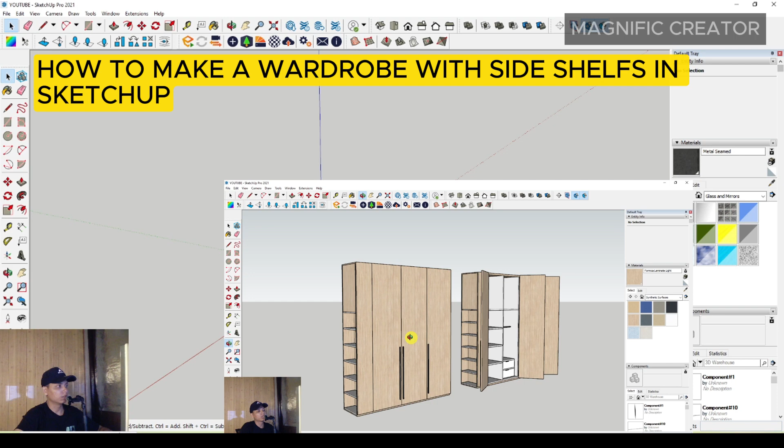In this video, I'd like to share with all of you about how to make a wardrobe with a side shelf in SketchUp.

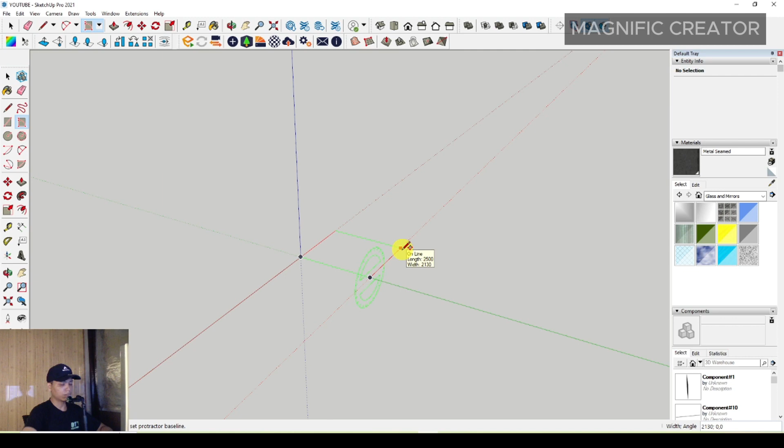First, you have to make a basic plan of the wardrobe. You can set the distance and length of the wardrobe around 2500 millimeters. Then you can set the height of the wardrobe around 600, and push it up until it reaches 3000 millimeters.

After that, you can offset it inside to make a frame, and pay attention to the side. You have to make a space for a side shelf.

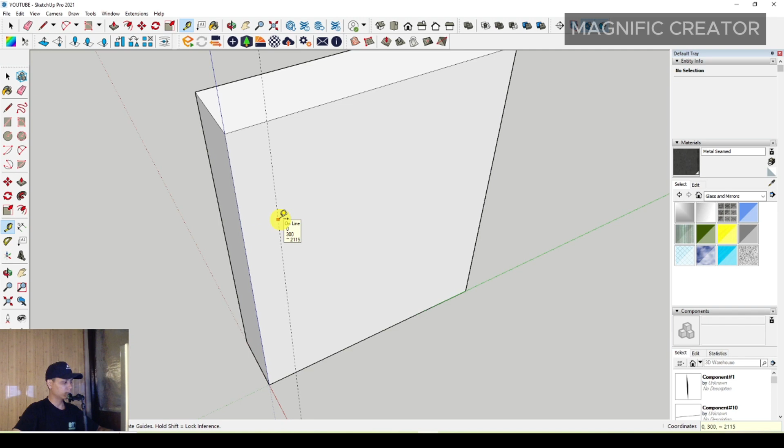It's maybe 300 for this side shelf. Then you can add a line right here, and offset it inside around 40 millimeters. Then push it to the back around 550 millimeters, and offset it inside around 20 millimeters only.

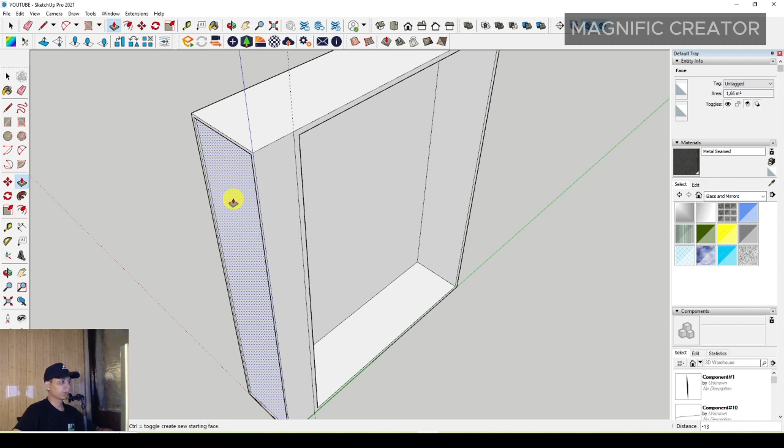Then you can push it until 250 millimeters. Okay, and then you can erase some unnecessary objects, and you'll get the basic shape of this wardrobe design.

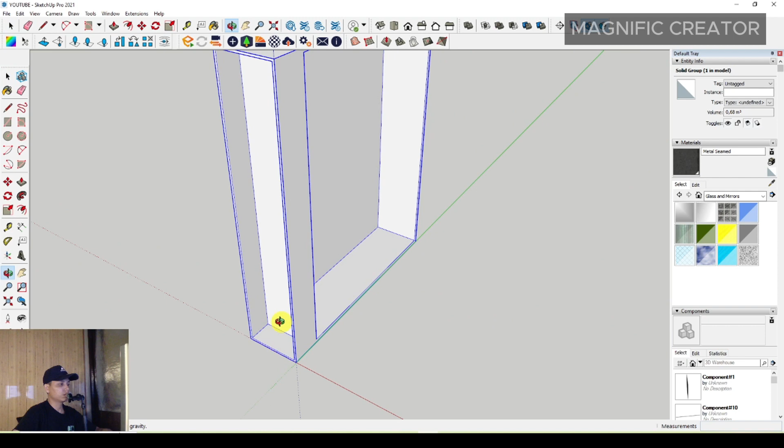Then you can make a shelf using the rectangle tool in this space, and push it up around 20 millimeters. Then just make it a group and make it a component.

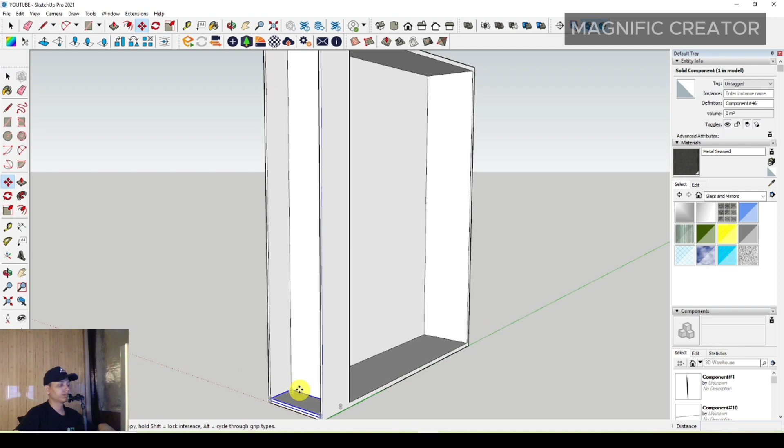Then you have to set the wardrobe height, maybe around the functional daily use of the wardrobe, around 2000 millimeters. You just type on your keyboard 2000 millimeters, then type 6 and slash, and press enter.

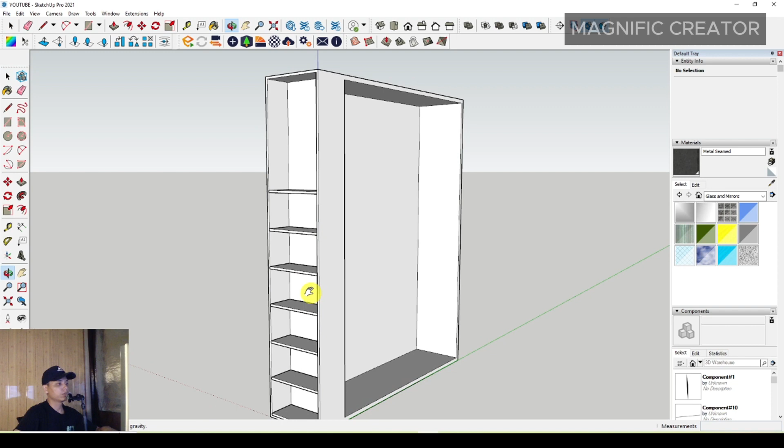So you will get the automatic divider for the shelf, and you can make a shelf again right here. Set the thickness around 30 millimeters, make it a group, and move it up until right here.

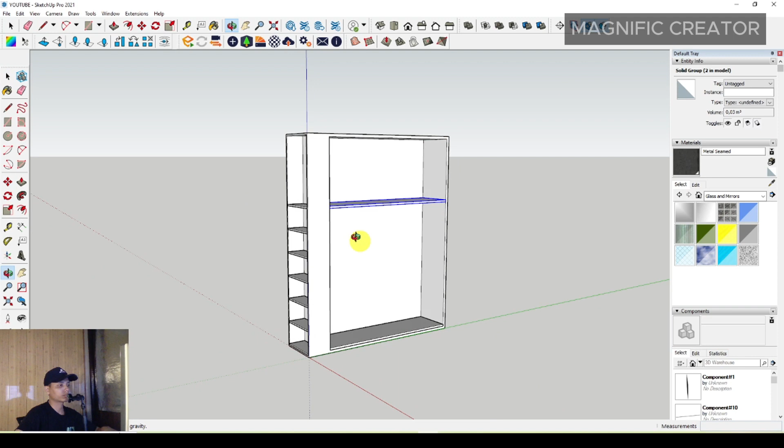After that, you can divide it into several compartments of this wardrobe space. Maybe you can divide it into 3 parts right here, then delete the center line, and use a rectangle.

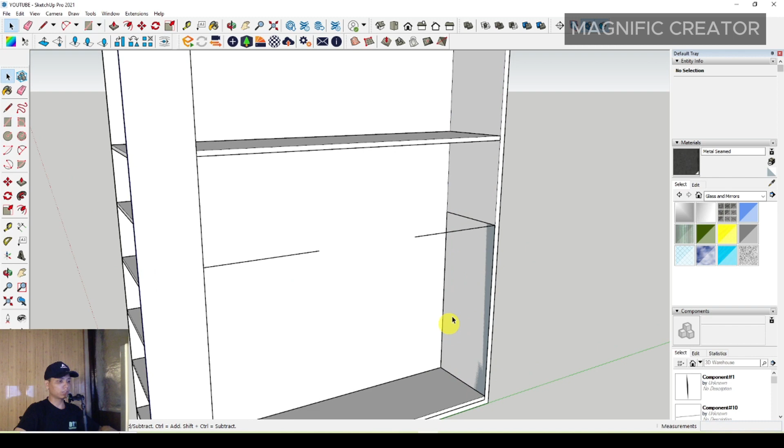You have to draw it first, then erase it, and push it to the left side around 30 millimeters, then just make it a group.

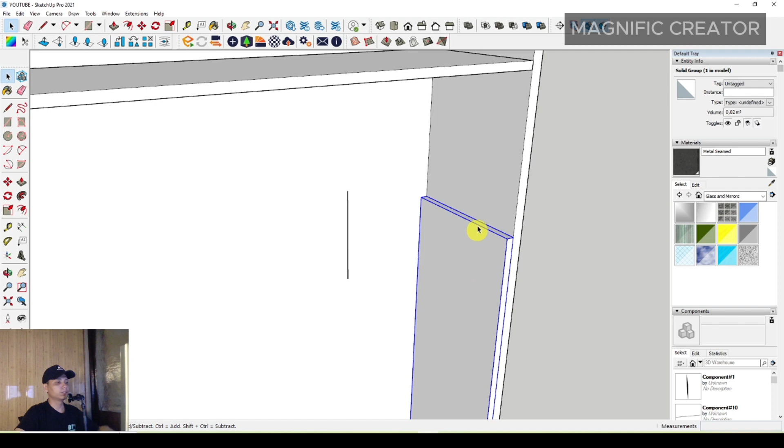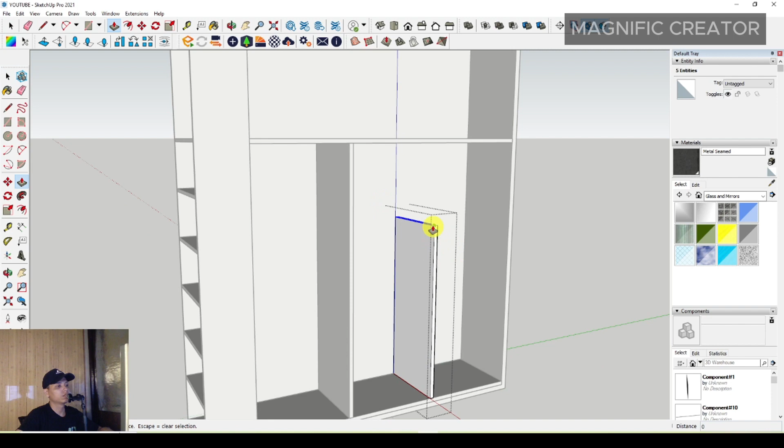Then you can move it to the position, and you will get the compartment, something like this. Then you have to push it up again with the push tool.

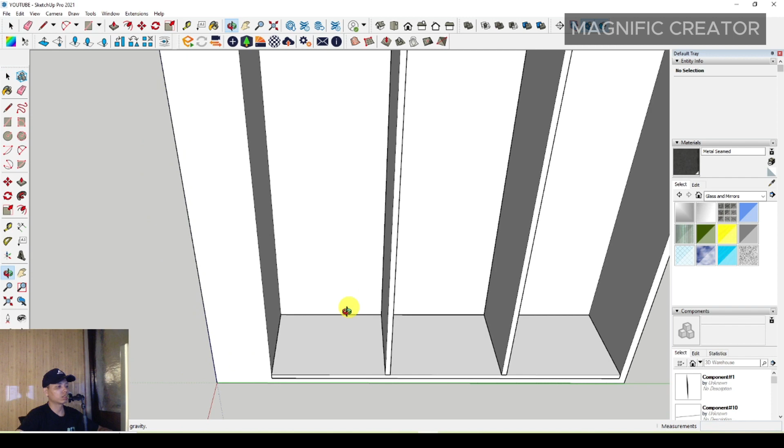You may make the divider more higher than before. Then you can make some shelf again right here, push it up until 30 millimeters, make it a group, and make it a component, then create it.

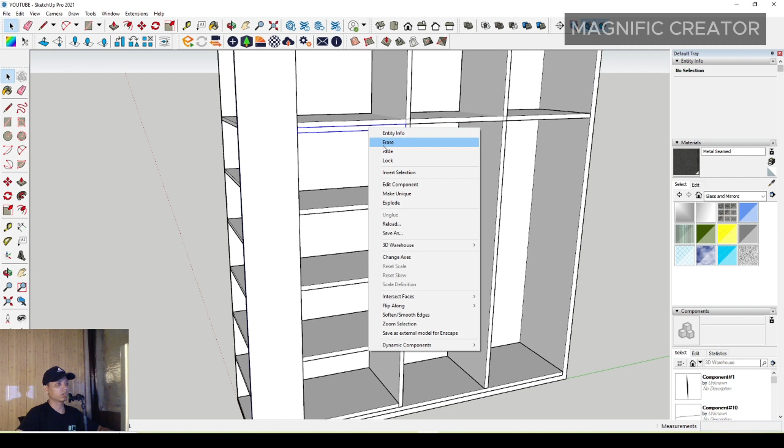Then you have to move and press Control, position it, type slash, and press enter, so you will get it. After that, delete unnecessary items, and move it while pressing Control to duplicate it on another side.

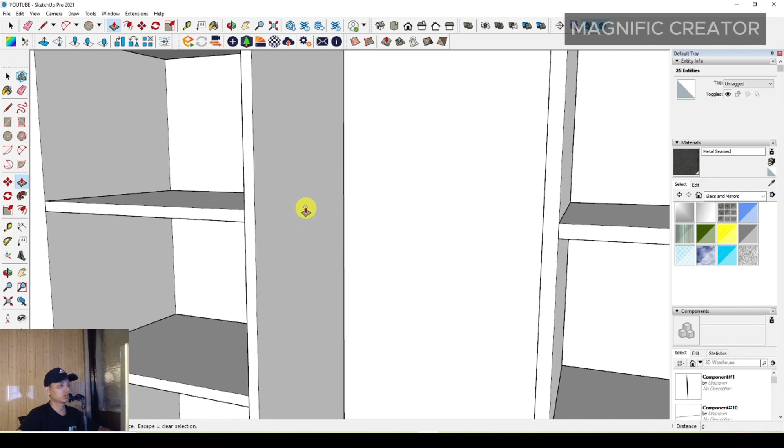Then you can use a circle to make a cloth holder stick right here, a cloth holder cylinder. Then you can adjust the color of the holder stick.

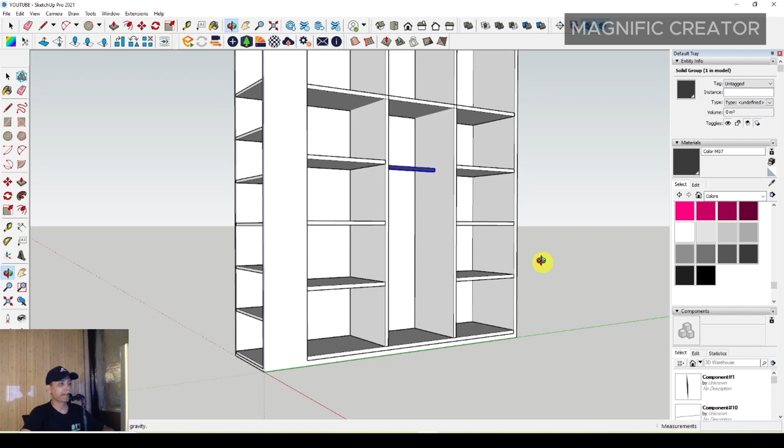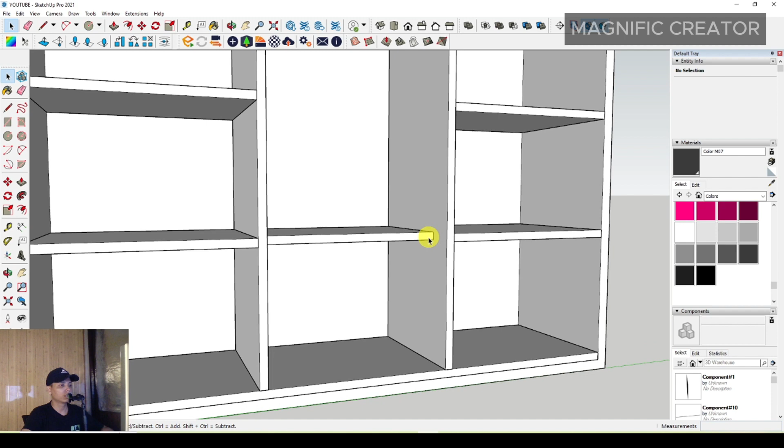Okay, something like this. You can also make another shelf in the center position, make it unique, adjust the dimension, and push it to the back, maybe around 100 millimeters, then divide it again to make more compartments, something like this.

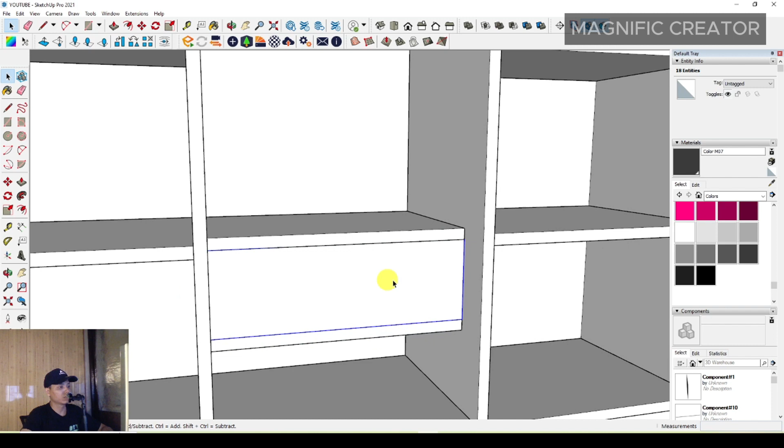Okay, then you can make more shelf again, make it a group, and move it to the front, then offset it inside. Maybe something like this, and then you can make a hole right here.

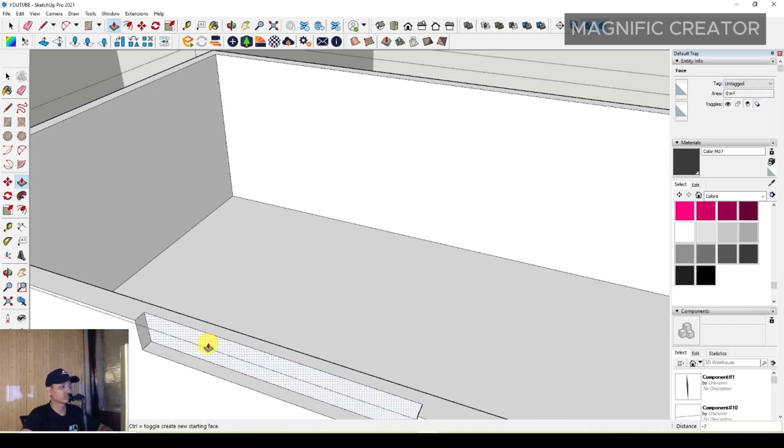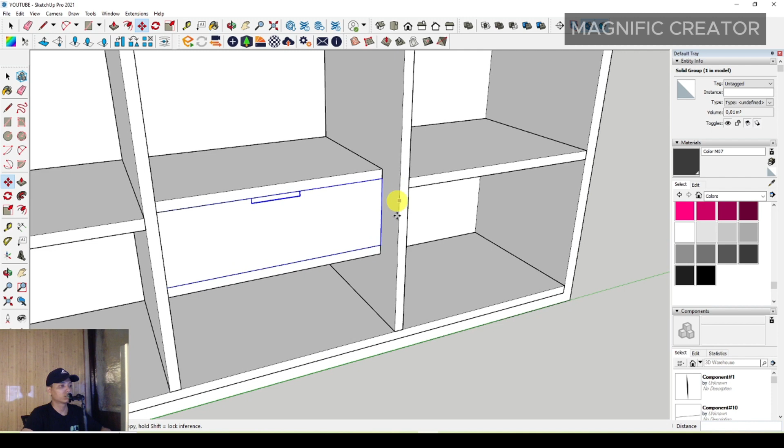You can use the push and pull tool to make the handle, the permanent handle of the drawer. Then you can duplicate it again, or adjust it.

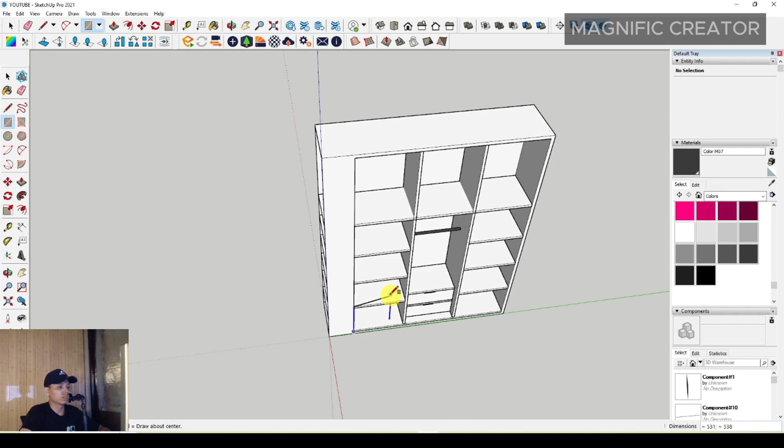Something like this. After that, you can make a door by using a rectangle right here, then push it to the front around 30 millimeters.

Then make it a group, push it to the center, make it a component also, create it, then move it to the right side.

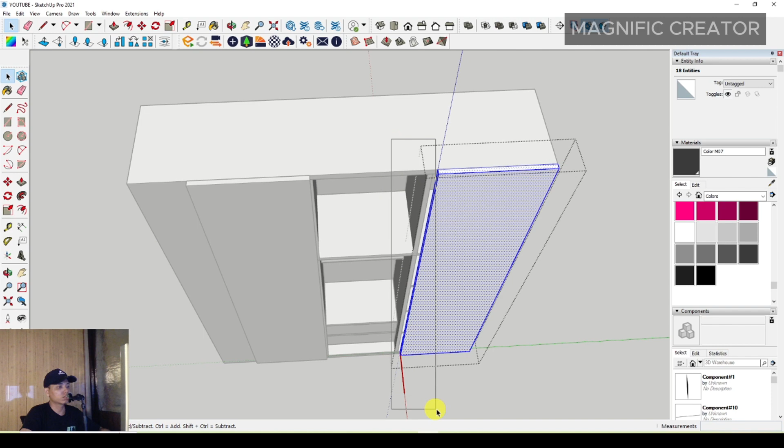Okay, you can make it unique again, then position it on the center, and move it to the center drawer of the wardrobe anyway.

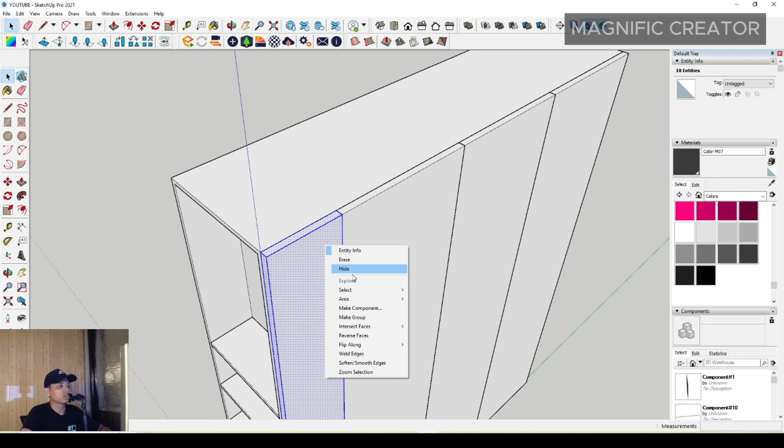Okay, maybe you can see it, and add more cover to the wardrobe to make it neater, and make it a cover for the door, and position it.

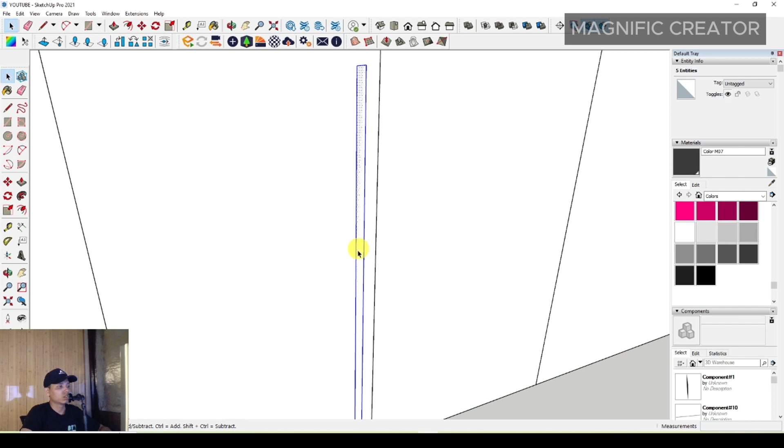Also you can make a door handle, a small door handle, to make it look more elegant anyway. So you can use this, make it a component, create it, and duplicate it again right here.

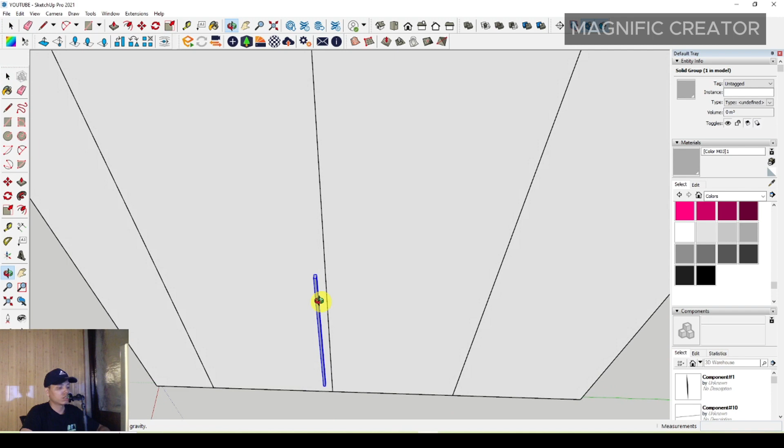And so you can make it a group, make it a group, and make it a group also. Okay, then you can adjust the color by selecting the Formica laminated light.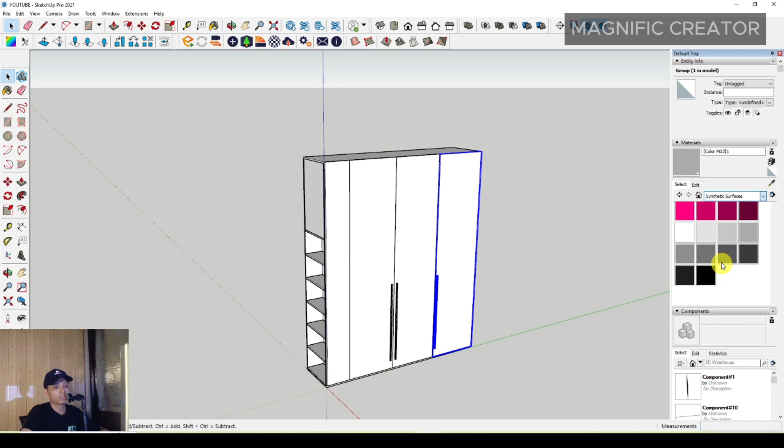Okay, so you can get the color of the wardrobe anyway, and then you can duplicate it to make a more representative presentation about the condition, how the wardrobe looks if it's open, and how if it's closed.

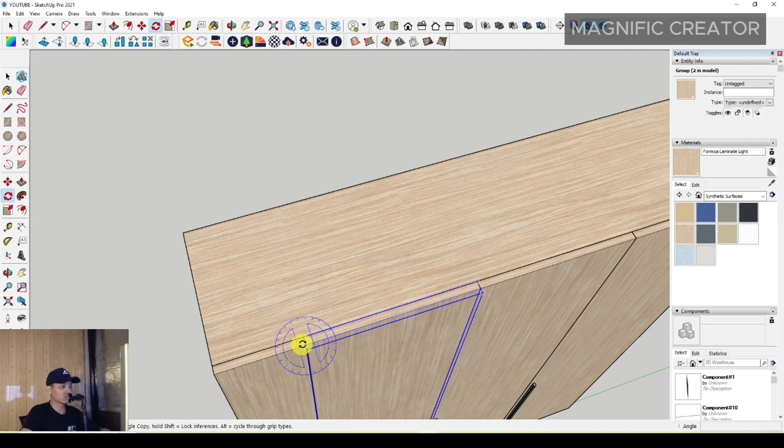So you can use a rotate tool to make it more representative, something like this. You can follow the steps.